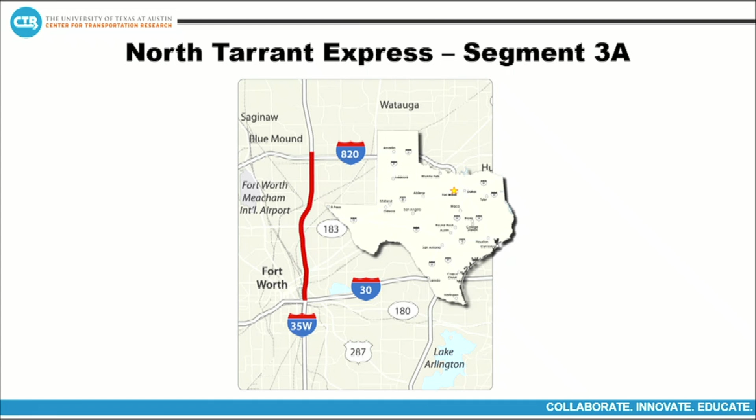Our project that I'm working on right now is the North Tarrant Express, segment 3A project. It's actually done, so we're moving on to the next phase, but it just finished up, so I'm going to present some of the work we did. It's just north of Fort Worth, Texas, near Dallas.

Our project was a public-private partnership. Basically what we're doing is adding capacity through a managed lane system in the interior. So what we're going to do, you can see the existing setup, we kind of shift everything outside and put new lanes in. We're leaving a little space for more highway lanes, so it's a highway within a highway.

We have the toll roads in the middle. Those are dynamic toll lanes, so guaranteed 50 miles an hour. You don't know what you're going to pay, it could be 95 cents, it could be $15, but you're guaranteed 50 miles an hour. Or you can hang out on the general purpose lanes, which are on the outer edges.

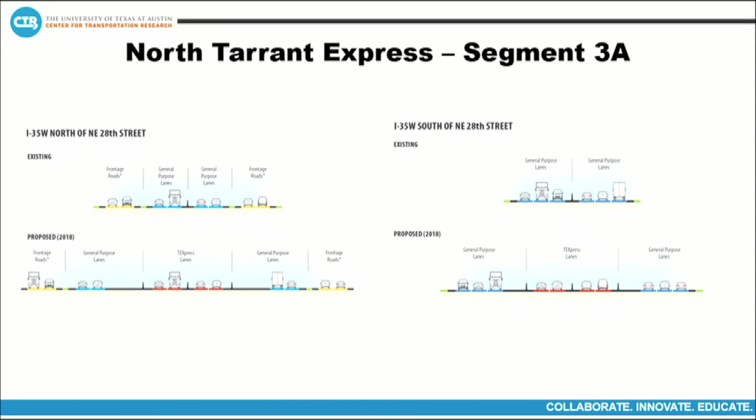Here's a couple of beauty shots of our project. One of the unique things is we have maybe one of the coolest interchanges. We have managed lanes that run north and south, and also east and west. So not only do we have direct connectors for general purpose to general purpose lanes on different highways, but we have managed lane to managed lane connections, which creates an amazing amount of direct connectors.

You can see also dealing with being near downtown Fort Worth, and that'll come into play here in a bit. It's a $1.4 billion project, TxDOT's the owner. We have a private developer, which is NTE Mobility Partners, if you know them. 6.3 miles, doubles capacity, we just finished up. You can see some of the traffic numbers, quite a bit of traffic. This is a NAFTA freight corridor as well, so we're dealing with trucks.

It's also a public-private partnership, so communication between different entities is where visualization can help, and it certainly did here. I'll present later on some work on 3C, which is upcoming, so there's different segments of this 35W project. Total is 18 miles over 3 segments.

So our first use of virtual reality, we've used visualization on this project the whole time, but talking about virtual reality was for aesthetics. And people are like, oh aesthetics, we're painting a bridge, who cares? Well, people in the city, when you're near downtown Fort Worth, do care. As you can see right now, we're near downtown Fort Worth. This is the interchange of 35W going north and south and 121 coming into downtown Fort Worth.

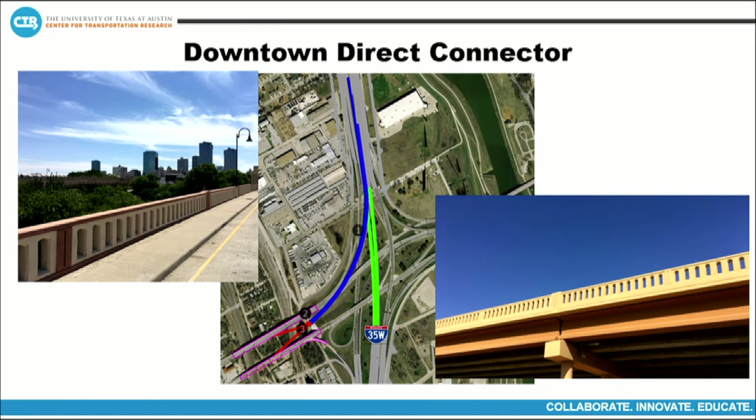And they looked at me as the visualization guy and said, Cameron, can you figure out some mock-ups of what this was going to look like? And I was like, yeah sure. So I'm thinking of all these color combinations, all the different locations we need to look at it. We have 35W there, we have as you're coming in on the managed lanes, as you're on the existing road, coming in there. It was just a complex interchange, multiple view angles. We had existing colors, it was very visible. This was one of 2 entrances into downtown. We had already existing elements present, and they wanted to paint this pretty quick.

So what we did, we had the 3D model basically created in this area. What was important was making sure we had all the elements in there. If you didn't model that managed lane bridge, which was the brown and tan, you might get a false idea of what you want to do. So we had to get everything that was painted or going to be painted, and how it was going to be painted, in the model. We had the different rail types.

We had sound walls. So we took our model, threw it into a gaming engine, walked around as a pedestrian, and then programmed it where you could change different elements of the bridges to different colors. We also put our team into the VR headset and used an external screen so we could communicate and collaborate.

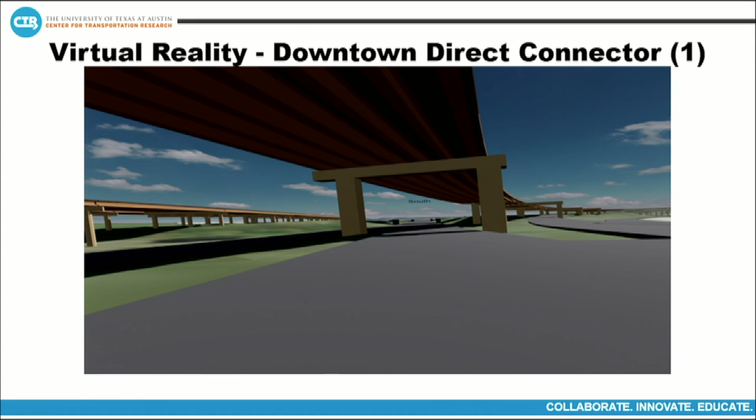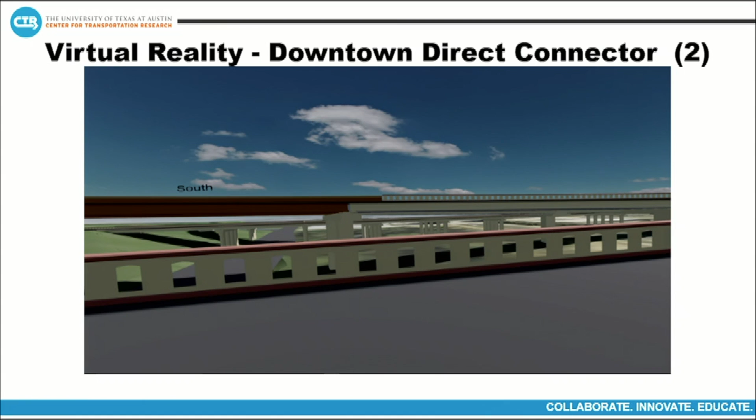So I want to show y'all some pictures. Here's 35W, here's what it looks like from 35W. Above you is that big direct connector bridge. To the left is the existing bridge that's already painted, already ready to go. Here's a view from where it splits—this is where, if you're on one of the highways, you see the direct connector coming in, and a possibility of where we would change the color. Here's what it looks like on the managed lanes.

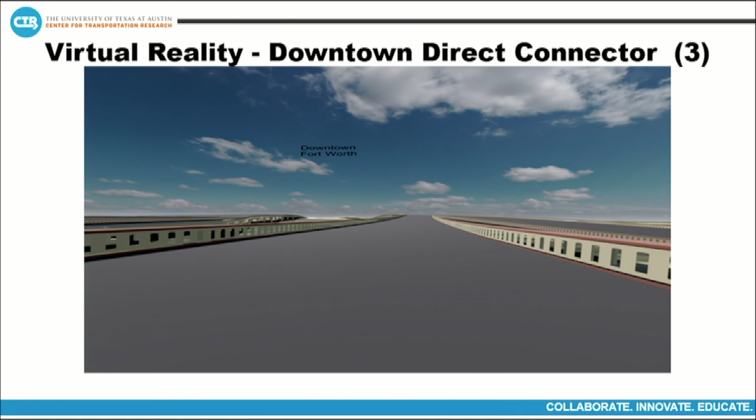I can't put you in virtual reality in the presentation, so I'm trying to do the best I can here. So here's just a video walking around.

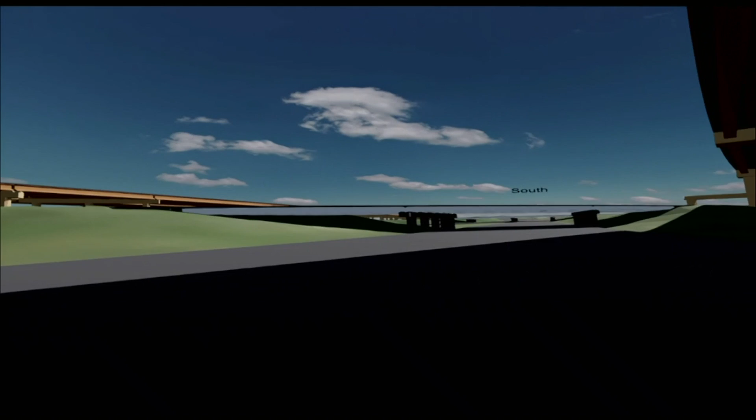Here's if you're kind of walking on 35W—I don't recommend that—what it looks like. You've got the managed lane bridge already painted over there. There's our new bridge, people don't know what to paint it. And then off in the distance is the other one.

Here's maybe a different video. So you can kind of split—you can go into downtown Fort Worth to the right, or you can keep going on 35. And so all these different angles just made it crazy.

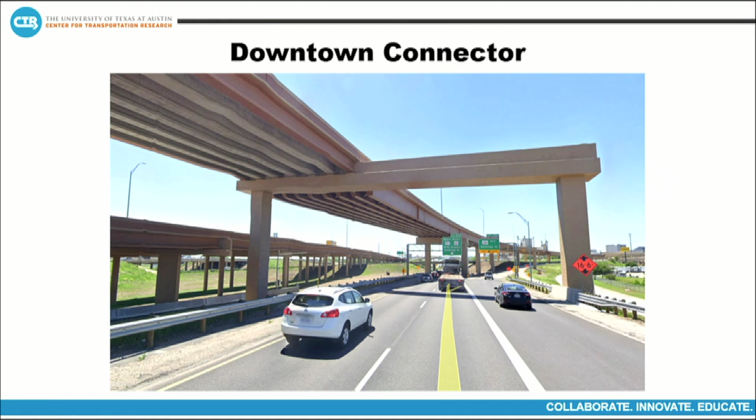So it's actually built. Here's that picture, kind of that same picture of 35. You can see that split where you're going to go into downtown Fort Worth. Here's where we decided to split the different colors—so, kind of spoiling it here of what we did. You see that's where it kind of splits into the existing bridge.

So what did we learn from this? Benefits that we realized from this and VR: increased communication. VR is cool, especially for people who have never used it in DOTs. We also had that external monitor, so people took turns. We really had a great discussion.

Whereas if we hadn't had VR, I would have emailed some people some pictures and it would have been limited. But when we were able to bring multiple people into VR in this cool environment, there is a draw because of VR, where we did get increased communication.

Increased certainty. One of the reasons I did VR is because I didn't want to render 150 or however many images of views. This way, we could look at it any way we wanted. You could teleport all around there. You had 360-degree content, we had all the angles. When we programmed the ability to change the bridge colors, you could look at all the different combinations—the weird thing where the beams were different colors. So we were able to increase our certainty because we tested all our hypotheses and looked at it from every angle. Time efficient.

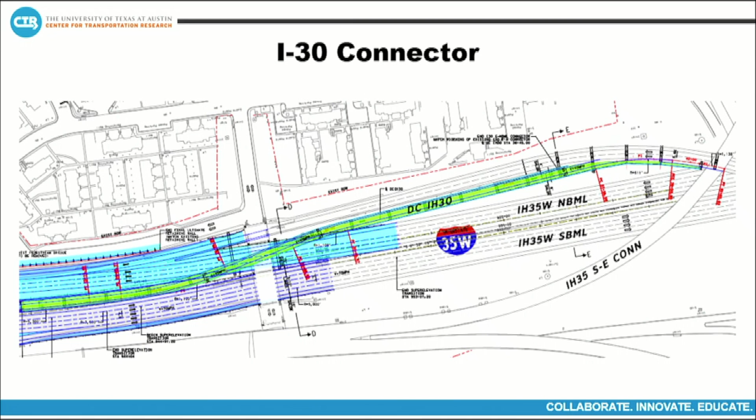So this one, again, it's existing, tying into an existing intersection. This is I-30 and 35W, right in the middle of downtown. We're kind of scabbing onto an existing I-30 direct connector, and then we're going to hop over. This one actually runs parallel.

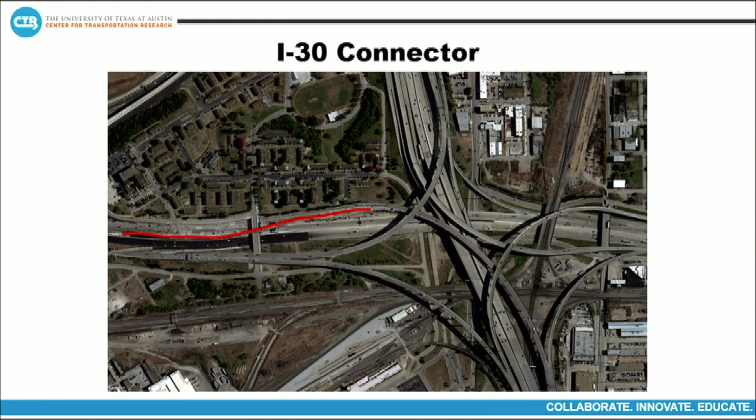So they said the same thing: Cameron, what color should we paint this bridge? And I'm like, all right, let's go. Let's get into VR. So just to give you all some examples here.

There's kind of what it would look like. You can then have a side-by-side of what it would look like if we painted it the existing colors, which was white for the whole intersection, or if we painted the project colors, and how we did that.

And so here we had the sound walls, and we had existing direct connectors over there to the left, which you can see. And we chose, which was kind of bold I think, to go with the existing white color in the area, and then we had to figure out where to stop it.

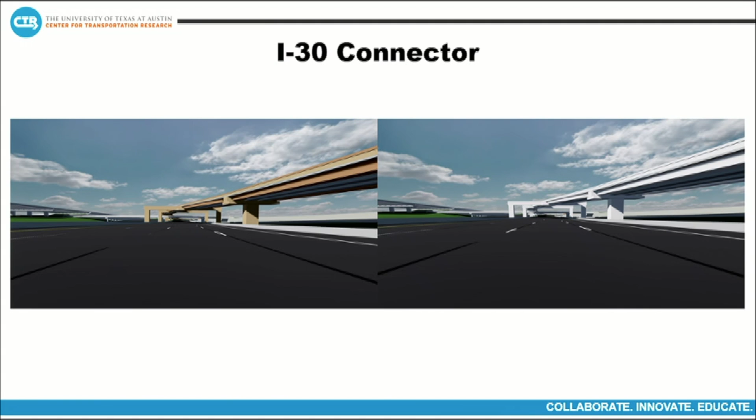So here's what that one looks like. Our new direct connector is over there to the right, and you can see some of the direct connectors over there to the left that were existing white, and I think it looks pretty good. So those were two things that we used for real on a project. We decided the colors, you can see it right there, basically, using virtual reality.

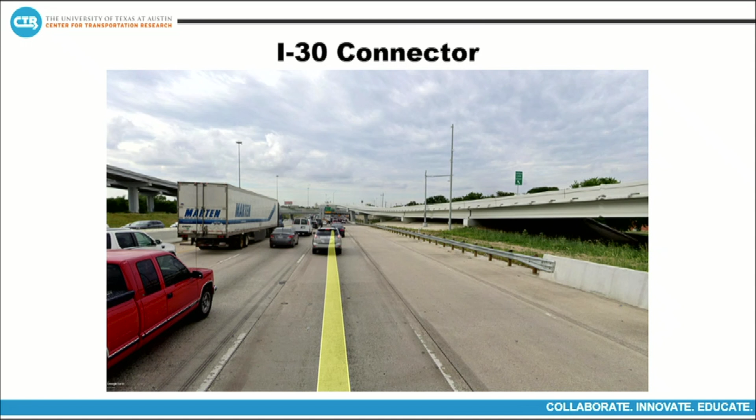So some things we're trying to do in the future, and where I would like to go, is driving, right? We work in transportation. We shouldn't be looking at projects only from a pedestrian point of view. There's a lot you can learn from driving, so I want to show you here.

So here's our little dune buggy. We're trying to make this more of an official car. So he has a virtual reality headset, a steering wheel, pedals, just as close as we can get it to real reality. As you can see, he's going like 100 miles an hour.

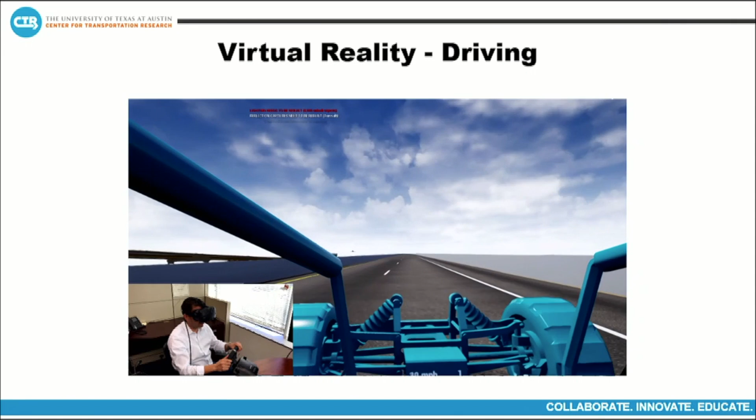So, moving at speed is going to open up some things for us. The thing that I'm trying to get at, that I'm going to talk about a little bit, is: is the headset enough?

There's our static airplane. All right, y'all kind of get it. You can drive wherever you want. You can fall off a cliff. It's really kind of crazy.

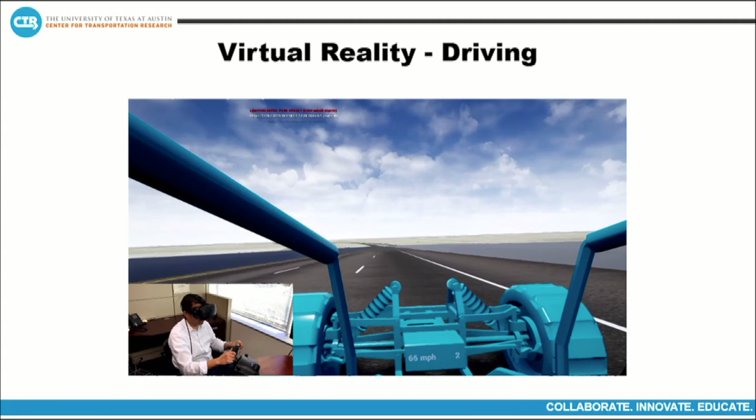So conclusions for me: VR is a powerful visualization tool. It's got the 360-degree content, it's got the scale, and one of the biggest things I think is the different interactions that you can program into it, from changing bridge colors to driving around to animating cranes. It's really a video game.

Also, we've learned that VR requires a different level of modeling. Some of our visualizations start out as a helicopter view, and when you're looking from 150 feet above the ground, you don't have to model as precisely. If your curbs aren't great, or there's a little bit of a gap, that doesn't show up when you're in a helicopter, but when you're a pedestrian or in a car, it's right there, it does show up.

So for me, I'm trying to figure out how to take VR from what I call maybe super visualization - it's not quite virtual reality - trying to get to where it elicits feelings, which is going to be hard because we don't have any G-forces. So when you're driving that car at 100 miles an hour, how do you make it feel like you're driving 100 miles an hour?

Do we need something that simulates G-forces? How else do you figure out speed? Is it pavement markings, or having more things coming, like signs, where you see the differences in how you're closing? And then that creates more things to model.